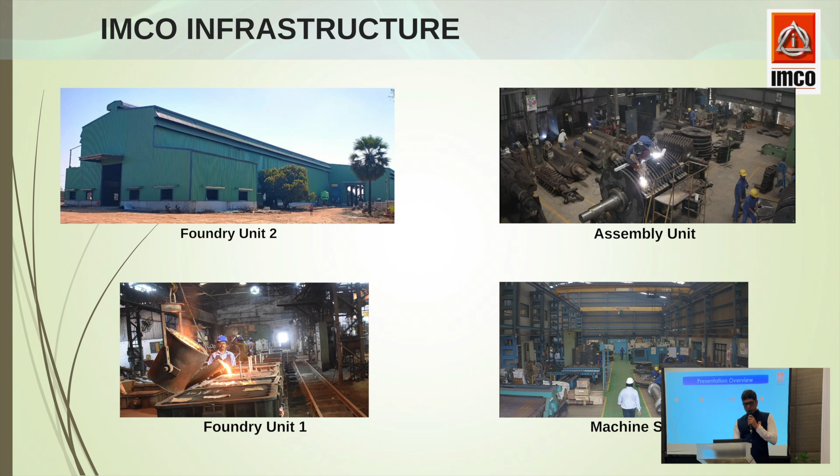This is just about our company. So my presentation will have an introduction. What is the requirement, or what is the impact of cane preparation for your working on mills? And we'll discuss the new design of cutter, which is called swing knife design, and what are the advantages and what are the problems we face with the present fixed type cutter we have in the industry. And we'll also discuss some results and discussion.

Now, as we all know, cane preparation is a very important part, and as we are going for mechanization of cane handling, as well as cane cutting operation, there are a lot of challenges going to come where the cane is first fed to the cutters for preparation. That is where most of the challenges will come, and it is very power intensive, with high maintenance cost involved in cane preparation.

Now, the objective is to have a higher cane preparation with long fiber, which is always a challenge, because when we try to increase the cane preparation index, you end up with a very powdery preparation, which also results in high reabsorption, whether it's milling or diffusion. I believe there was a presentation on the diffuser by the previous presenter. If you have very powdery preparation, you have a lot of choking problems in the diffuser. And in case of milling, you have a lot of reabsorption problems.

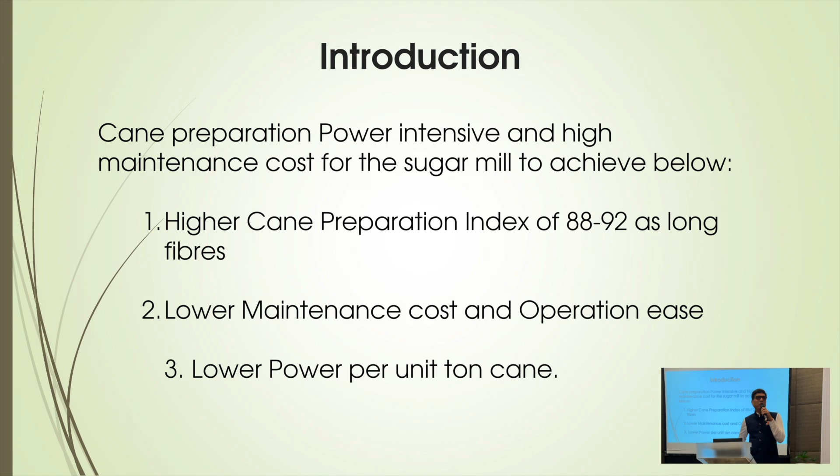So cane preparation is very important for the milling system, as well as because of a lot of extraneous matter, which could be stone, or sand coming along with the roots of the sugarcane. So you have to take really good care of the cane preparation. As I said, lower maintenance cost and lower power per ton of cane. This is very important for factories which are exporting power to the grid.

This is just to give you an idea of the various power requirements for a typical factory. We have a leveler, kicker, and the clearance. It also depends on what kind of clearance we are operating. As we progress, we have different clearances for the leveler, cutter, and chopper. And lastly, the cane goes to the shredder, where you do the final preparation. So this is just an idea.

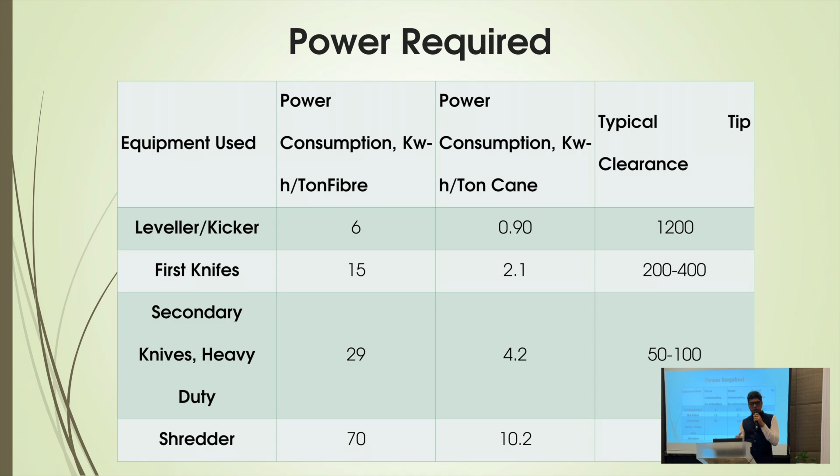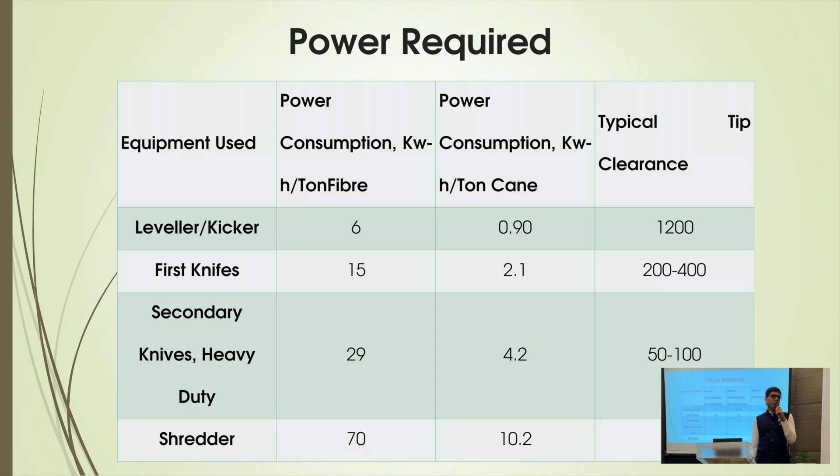So all around, you have 10 to 14 units per ton of cane installed. And depending on your setting of equipment, you could have 8 to 10 or 9 to 12 units per ton of cane, which is the operating power required for cane preparation.

Just to give you an idea, as already reported in literature, everyone knows that cane preparation is a very important part in milling or diffusion. In fact, it is most important for the diffuser, because if your cane is not well prepared, you will not get the required extraction. But in case of milling, even if you have a lower cane preparation, it can be balanced.

So for every 1 unit of cane preparation, you will have 0.2 unit higher mill extraction. In fact, it can be more, depending on the factory and what kind of milling system you have. It could be as high as 0.3 unit mill extraction per unit of cane preparation index, which is measured as pol in open cell. The standard method is that you take the prepared cane sample and put it into a water vessel where the water is circulated, and depending on the open cells, the brix is absorbed into the water, and that brix is converted into pol in open cell.

Now, I am very clearly saying that the above is not always valid. Even if some mills claim they have very high cane preparation, that does not really result in higher extraction. It is because of a very powdery preparation. And powdery preparation is a very, very important part of the cane preparation system.

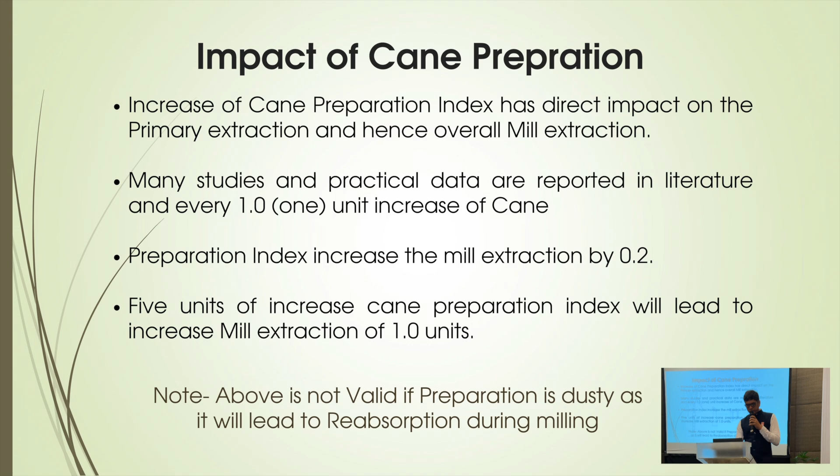Now, some people think that cutting is not important. Some people have a single cane fiberizer, where you do some cutting, maybe one small cutter, and the cane directly goes to the shredder or fiberizer, especially an inline fiberizer. But I don't buy this idea, because if you see the cane piece, it has got a rind, and the rind portion is very hard. And if the rind portion is not cut before it goes to the shredder or fiberizer, you have very high maintenance on both the shredder and fiberizer.

So when I say cutting, it's more of a shearing of cane, shearing the rind portion, which is the hardest part of the sugarcane. And that is where cane preparation becomes a very important part. That's why cutting is important. I say cutting is important before the fiberizer or shredder.

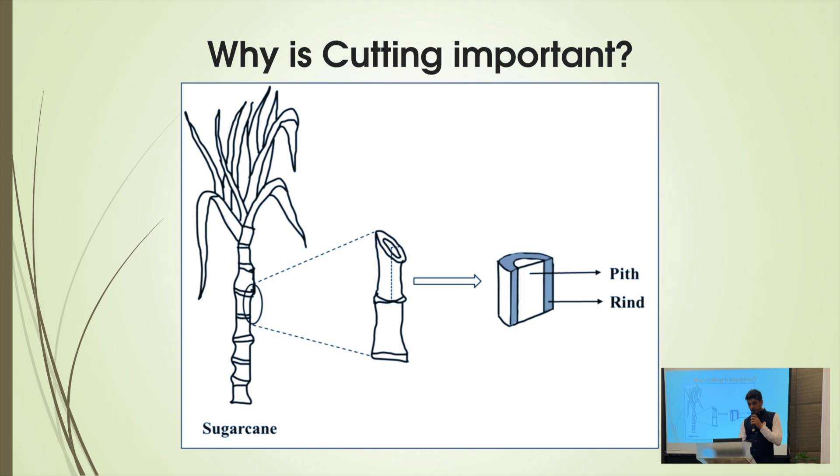Now I'm going to talk about the new type of design, which is called swing cane. We all use cutters or choppers for cutting of sugar cane, which is fixed type cutter. This is a swing design where the knife is also moving. It's like the concept is from the fiberizer shredder, which is also a swing design. So why not we have the same type of design with our sintered carbide knife for cutting the sugar cane.

So it has a lot of advantages. As I said, all the cutters and choppers are used as pre-preparatory devices. It avoids jamming of cane because the knife can adjust the gap. If there is an overfeed of cane, the knife can move back and allow the sugar cane to pass. We can also do the reinforcement of hub protection with our carbide tips.

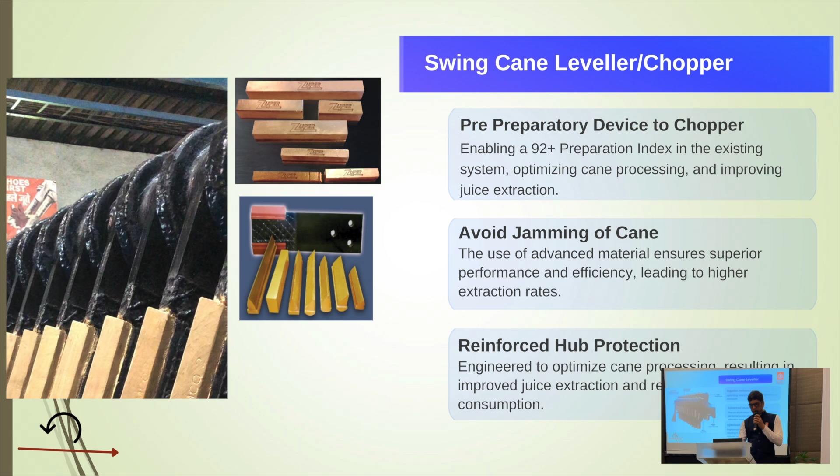Now this is just to show you the picture. You can see the whole assembly, which is a swing knife, mounted on one pin, like what we have in a fiber shredder. And also sometimes on the hub we do the sintered carbide welding, so the hub also acts as a cutter.

Now if you really see, the cutter is like a mixer - I call it a mixer actually. It is not like a perfect chute like a shredder where the cane is fed from the top and at the bottom you get prepared cane. It is the entire cane which is on the cane carrier, whether it's operating in forward or reverse direction. Sometimes people operate the cutter in reverse direction. It acts like a mixer actually.

So the whole amount of cane - when I say whole amount of cane, that's for long cane, not for billet cane, because we are still not in billet cane here - goes in a mixer type of arrangement, where the cane is cut or sheared into pieces. I would say shearing action is more important than cutting action.

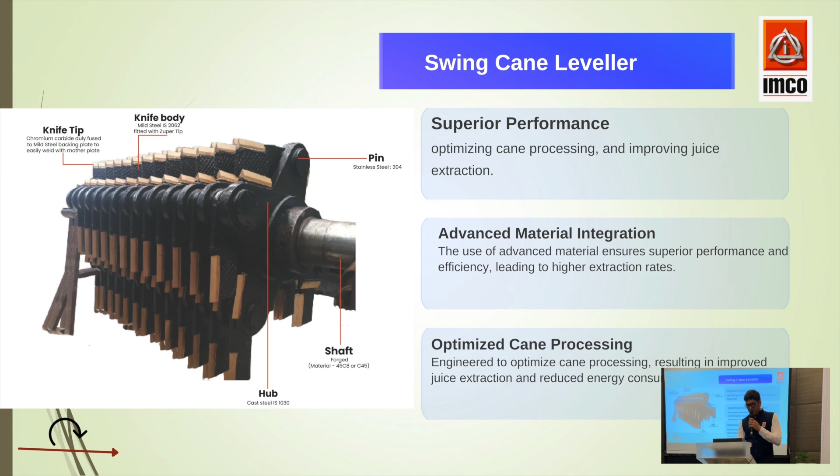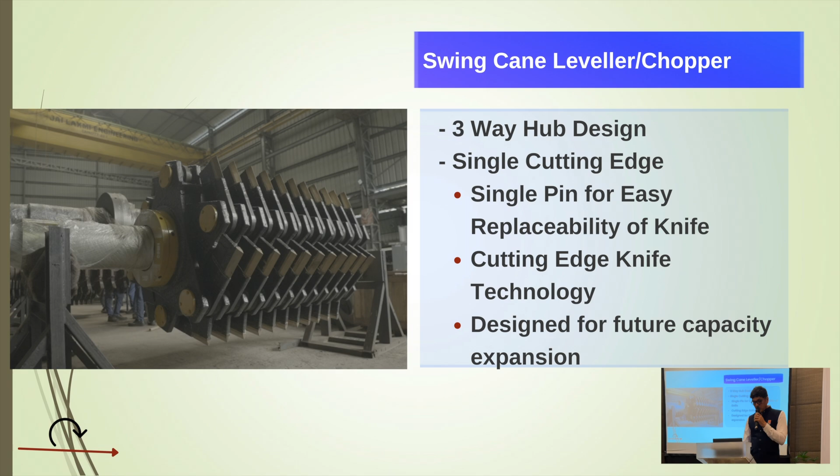So this is our complete assembly. Now we have a different design - it can be a three-way design. In case of three-way design, you can put three knives on one hub, so you can put more knives in the same amount of width. In case of two-way design, you have two knives on one hub. The pitch can be adjusted depending on the requirement. The advantage of this kind of design is that you can operate with a lower clearance.

Now, how does the swing action happen actually? It happens because of impact and also centrifugal shearing action. That's why it's called double impact. We can operate this at lower clearances compared to any fixed type design. When you operate with lower clearances from the cane carrier, you get a higher contact area. And because of the higher contact area and double impact action, the knife also gets the impact, and it's got every action has a reaction, what we call. So you get a double action - impact and shearing action.

And that makes the cane preparation much better, and you have lower power compared to any fixed type cutter. In fact, what we have observed is that for a fiber of 14%, it is less than 1.5 units per ton of cane. But if you have higher fiber, especially in Africa where the fiber is more than 18-19%, it is more than 3 units per ton of cane. So you get better impact action and better shearing action, and also we can operate with lower clearances, so we have higher contact for the entire cutting action. The power is better utilized, so you get lower power for cutting the sugarcane.

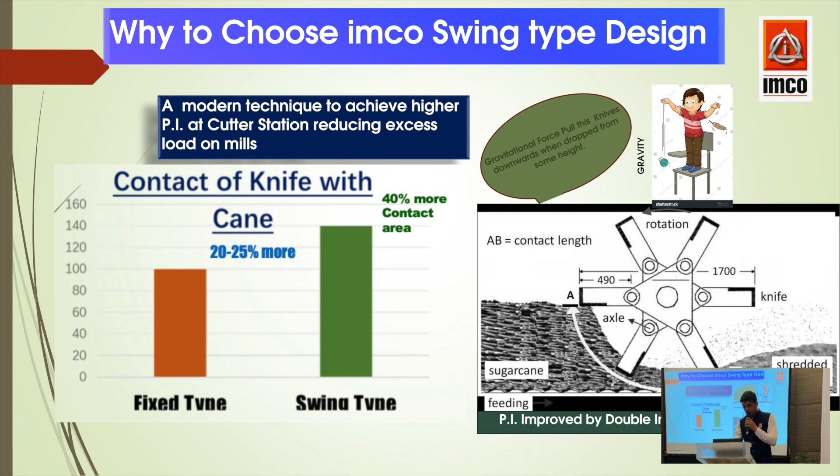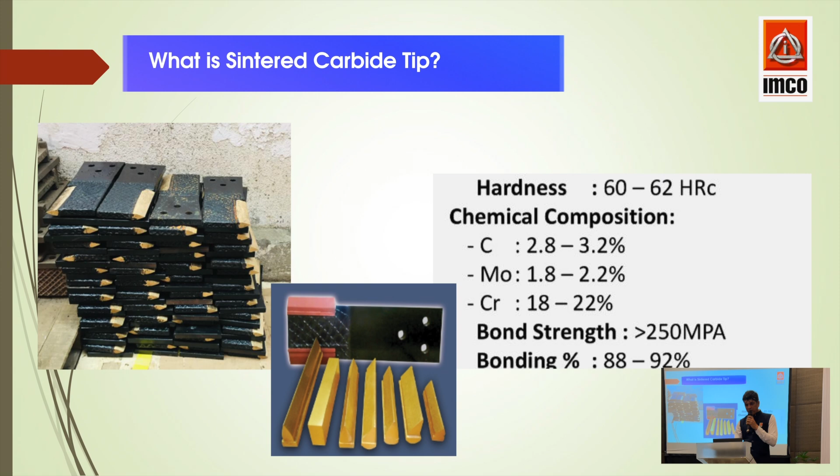And in your case, sometimes a big stone comes. Even if the stone comes, at the most it will break my tip, which can be easily replaced actually, very fast.

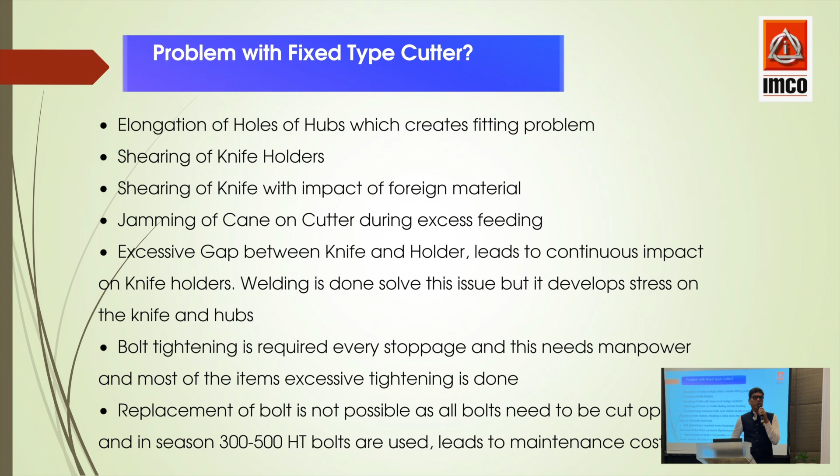These are the type of failures we want to show - mostly the shearing of the knife.

Then you need excessive manpower to tighten the bolts, and nowadays it's very difficult to get manpower for this kind of work because everybody wants to work on artificial intelligence. So this is a very problematic area for the sugar industry - it needs excessive manpower for tightening bolts.

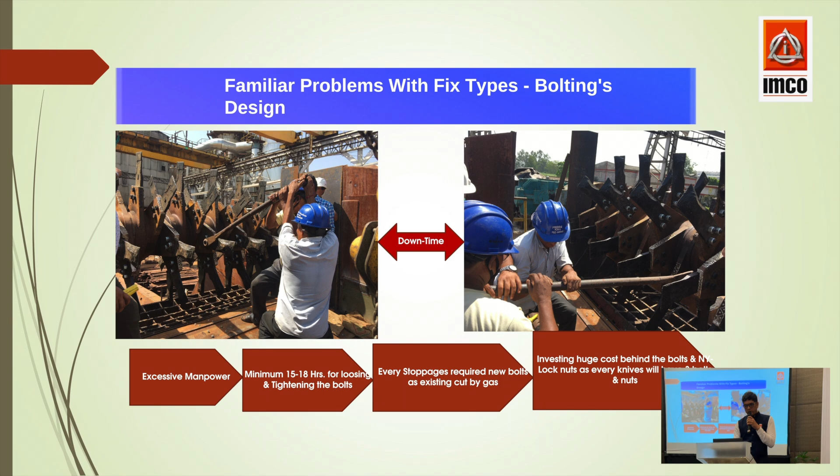I talked about the problem of jamming because of overfeeding. In the swing type, we don't observe any jamming, even if it's overfed, to an extent.

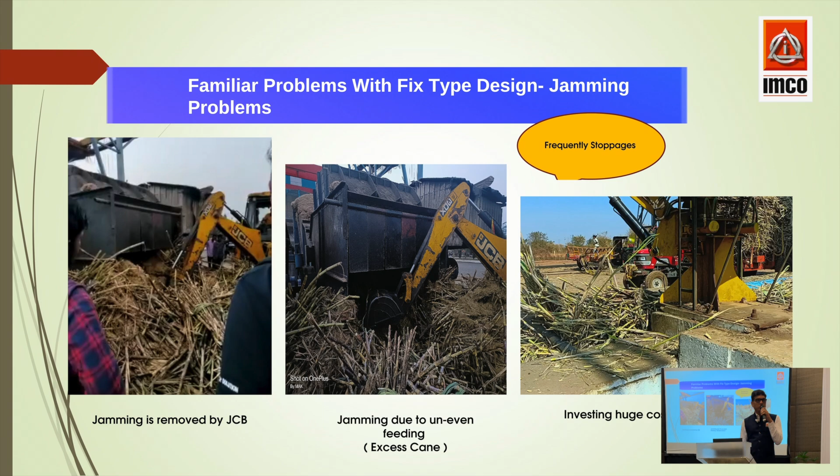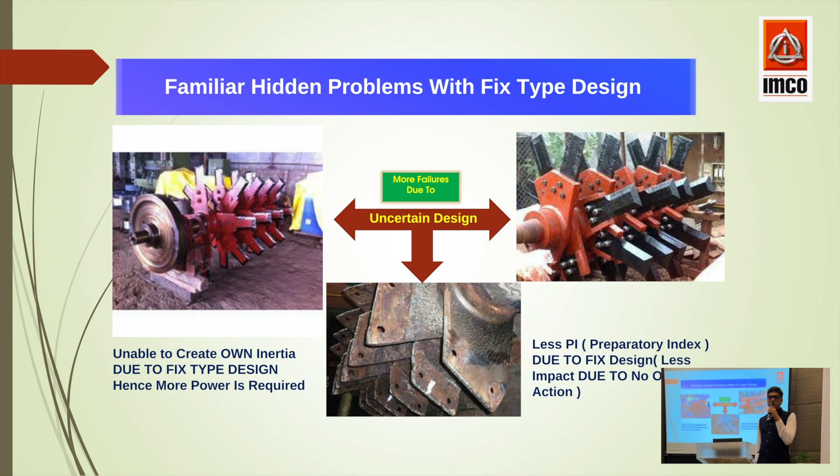So I call the fixed type an uncertain design, because the bolts get sheared, the holders get oblong, the hole gets oblong, and you have to cut the bolt. So there are many issues which happen - high maintenance issue - which is the problem with the fixed type design.

Now just to give you an idea, it's not like some very new equipment. There's a company called Fulton that has this kind of equipment. Of course they have a disc instead of what I've shown you as a three-way or two-way design, and they have a regular knife. What we have is a sintered carbide tip - that's one difference - and we use a two-way or three-way design. This equipment has already been in Central America and Mexico.

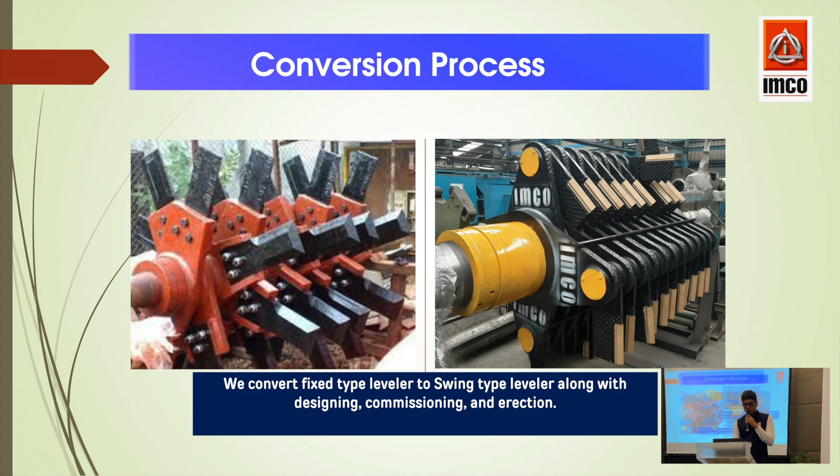Your knife replacement is very easy - it's just mounted on the pin, so you just remove the pin. It's less than 3 to 4 hours to replace all the knives. So nil downtime.

This is just multiple benefits which we discussed. There is one more video - okay, we'll just skip that.

It's working. Imco Fixed Type Leveler is optimally designed for seamless integration with the main cane carrier, significantly boosting cane density fed to cutters and enhancing overall throughput and performance. Our heavy-duty Imco cutter is perfect for auxiliary carrier operations, with custom modifications to prevent jamming and a sophisticated dual knife configuration. It ensures consistency and smooth operation.

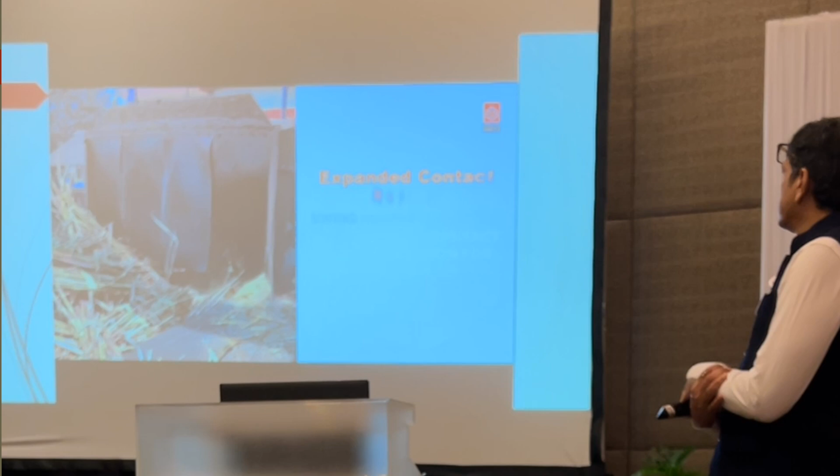For those needing even more precision, our cutters are available with an anvil plate design. Imco Swing Type Design Leveler is tailored to meet your factory's specific requirements, layouts, and expansion goals. It offers a 25% reduction in overall power consumption per ton of cane, even with higher fiber content. The expanded contact radius during rotation ensures more effective cutting, while the durable design eliminates knife breakage with a robust shear mechanism on bolts and holders. Energy efficient and easy to maintain, our knives can be quickly replaced within hours, reducing downtime losses and labor costs.

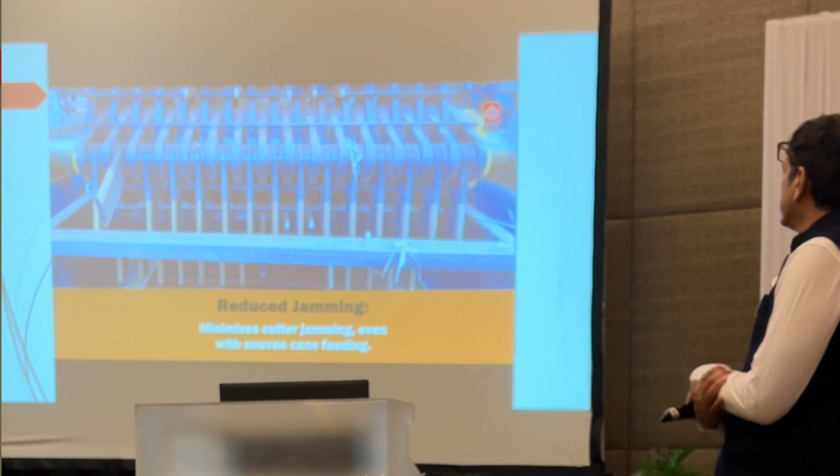Experience revolutionary cutting with our dynamic double impact. The swing knife design generates a powerful double impact cutting action, utilizing the knife's own weight to enhance efficiency and shearing action. With reduced jamming and increased contact efficiency, our design features a reduced carrier gap, enhancing the contact action by 25%. Imco's precision machining ensures a very compact and vibration-free design, offering superior edge retention, sharpness, and increased cutting efficiency. We have unparalleled infrastructure, quality, and door-to-door service.

So this is just a typical layout where there is a first cutter and then a second. Generally we prefer that the second cutter should be a swing type and operate in the reverse direction, which is before the fibrizer or before the shredder, depending on the factory configuration.

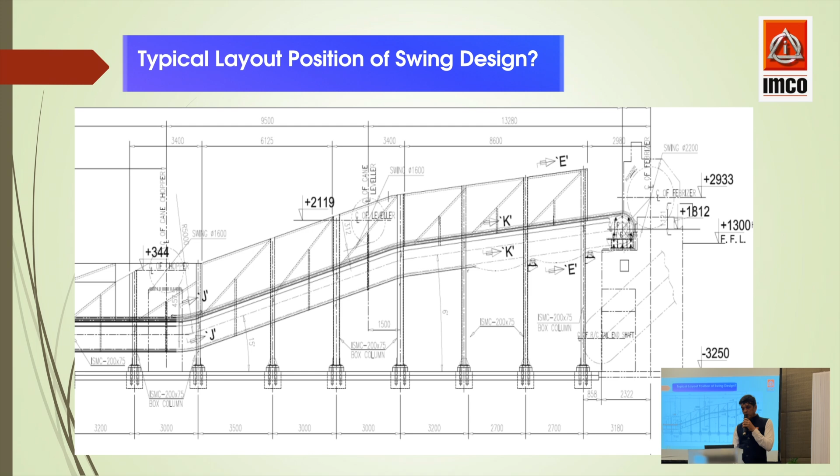So this is the experience in India and Africa. We have been converting a lot of this in India and Africa, and we can convert any of your existing cutters by just replacing the two-way or three-way design, utilizing the existing bearing housing, motor, and foundation. So there is not a very big impact on the cost of replacing an existing cutter. And if something goes wrong, you can go back to the old design.

So I've learned from one Filipino person that whatever changes you make, they should be reversible. Because the sugar mill needs to be very reliable - if anything goes wrong with the sugar mill, the planters or farmers suffer. So you have to have very high reliability of equipment when you make any changes. Thank you.